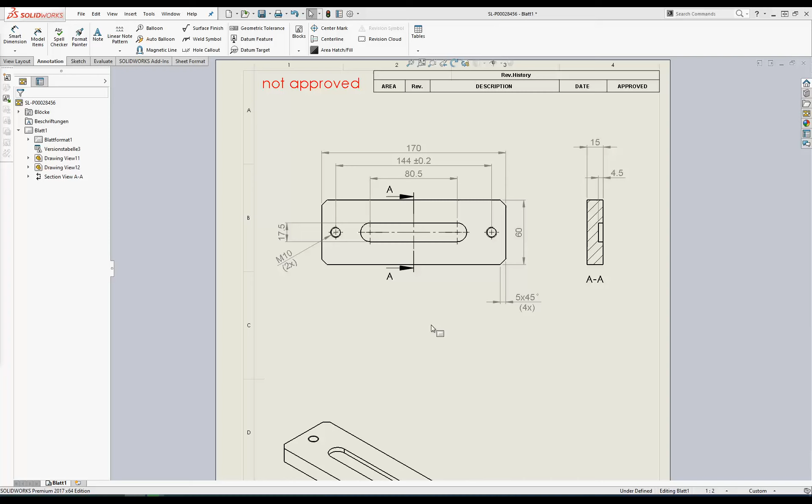We're doing a bit more drawing reading, tolerances and things like that. This is a super tiny part. Should take us no longer than 2 minutes, I hope. So what do we have? We have a little block. It is 60 times 170 times 15. We are in MMGS, of course. I hope. MMGS. Good, nothing changed. Great.

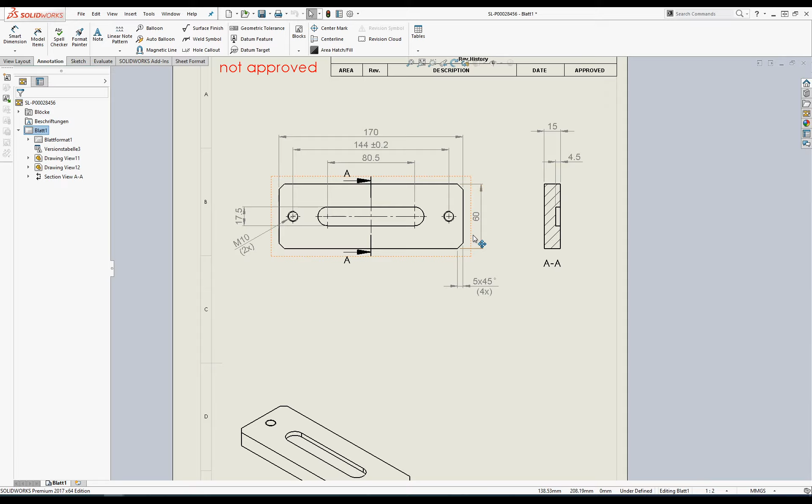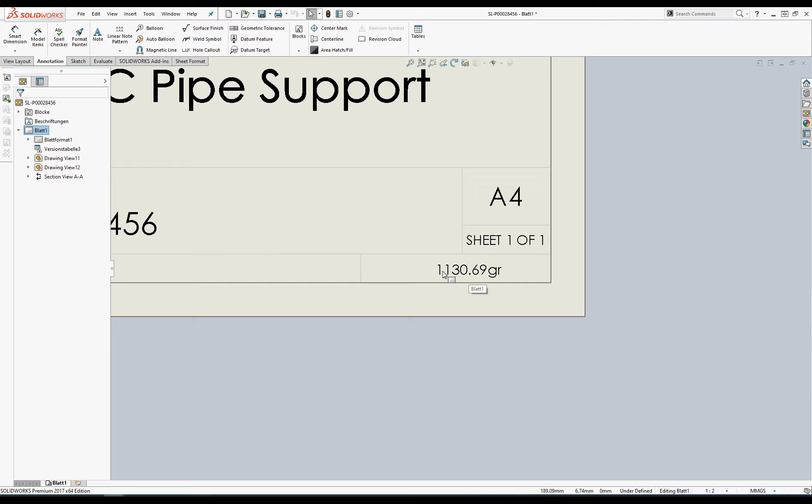So this is a piece of metal. It's made of this material. It is stainless steel. It weighs 1 kilo 100. So it's quite massive, but it's tiny. What else do we have?

So after we cut this part, we have a 5 millimeter by 45 degree chamfer. We have this slot here that's 17.5 across, 4.5 deep, and we have 2 holes that are through. M10 times 2, they are 144 millimeters from one another, plus minus 0.2 millimeters.

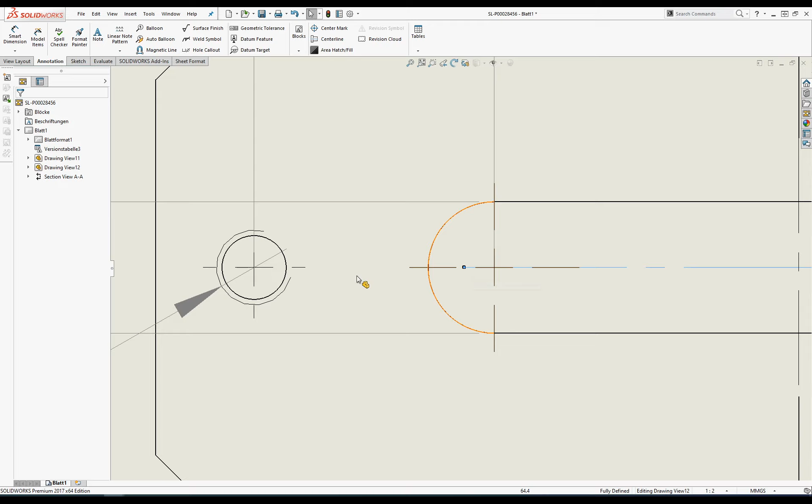And this is of course around the center, and they don't have a vertical dimension because they are also sitting on the center line. Like if you take a ruler and you check, this will be 1 to 2. What else do we have? This slot is 80.5 across.

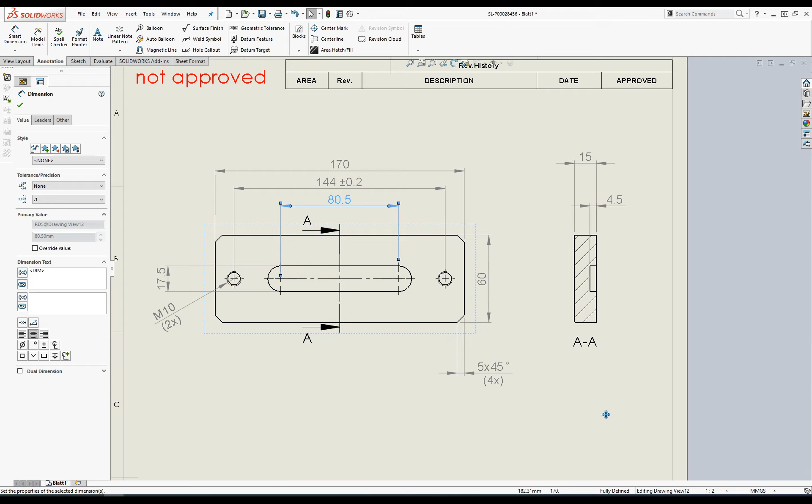This is to accommodate. This was a holder for a tube shell. Like there was a tube that needed to be held and fixed to the ground or to a plate, and this does it. Like the pipe shell is screwed through these two, and that is later on screwed into the floor.

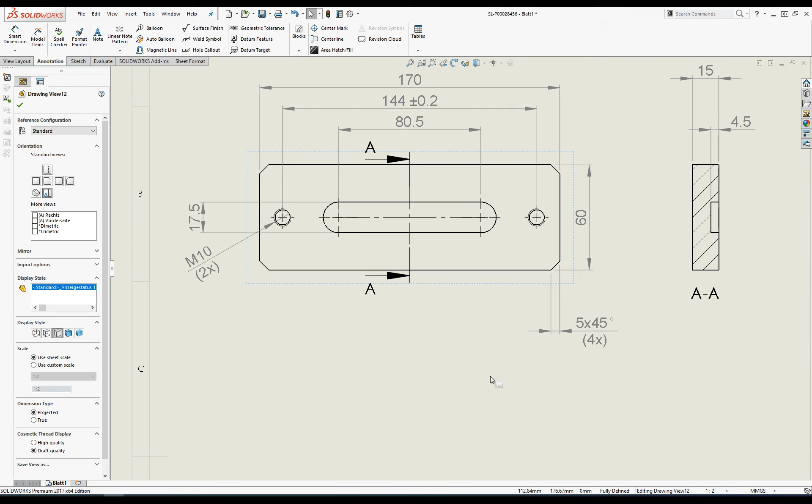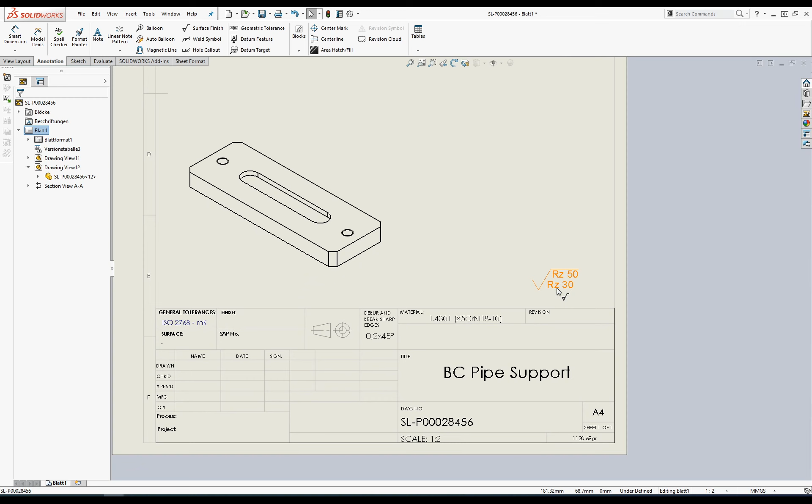At the bottom, at the header of the... It took me like 2 minutes 50.

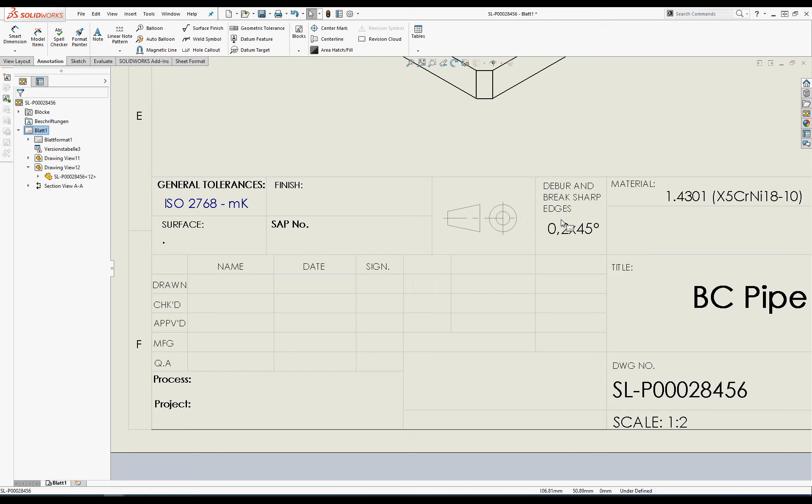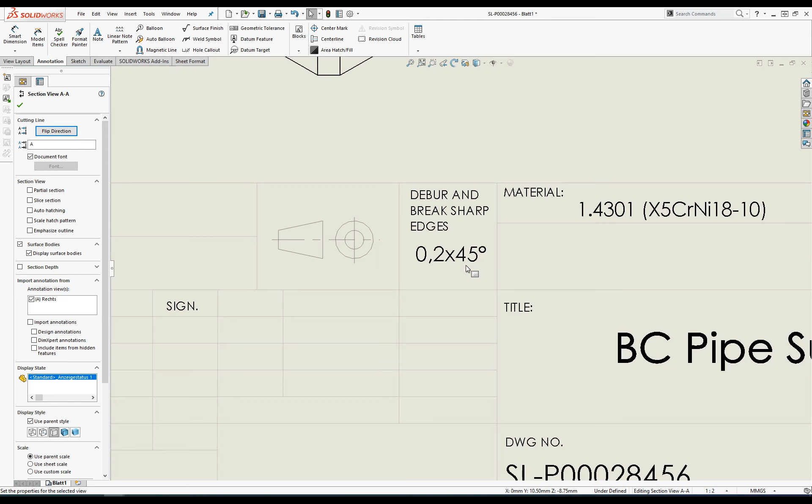At the header of the drawing, you have here that whenever you have something that's not dimensioned, like if you have a corner, for example this, this is a good example of this. This thing cannot be like 90 degrees exactly. So whenever it's not dimensioned, you have a 0.2 chamfer, times 45, and this is the general tolerances that you use.

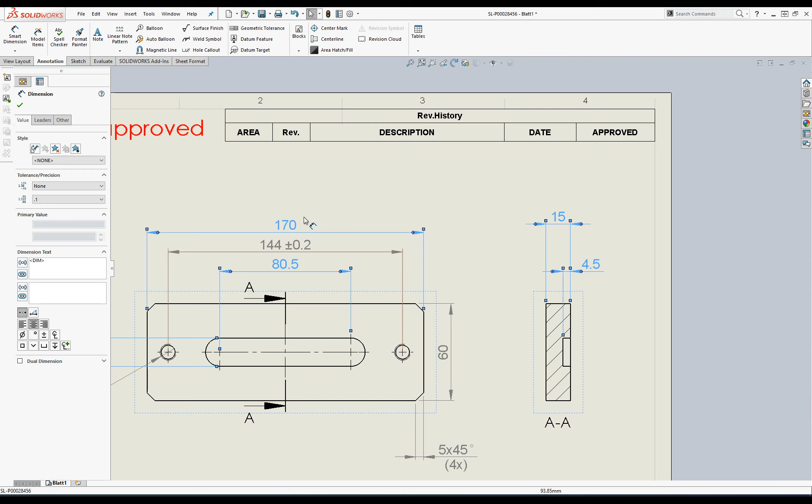And because, for example, this and this and this measurement, these also don't have a tolerance, but 170 doesn't exist. Like it cannot be exactly 170 plus minus 0.00000. So this 2768 MK means that it's the middle, like it's not the fine tolerance and not the rough tolerance.

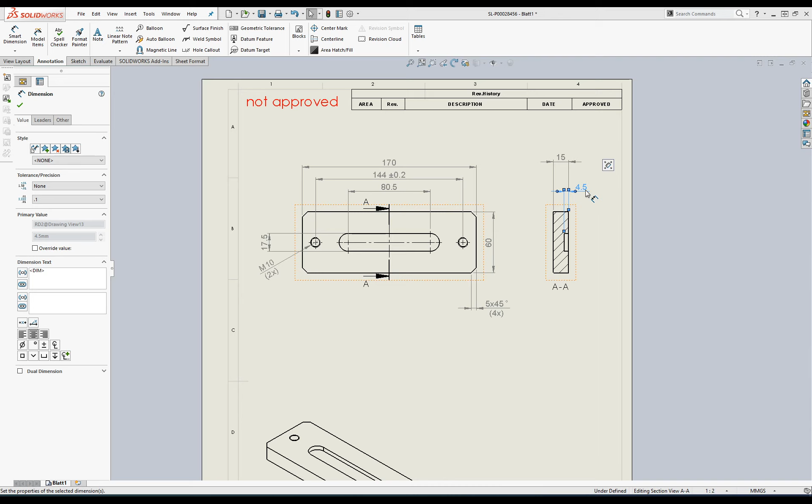They specify for each of these what they will be. Like I think this is plus minus 0.2 and this is plus minus 0.1 and this would be like plus minus 0.3 if I remember correctly. And yeah, that's it. Super quick, right? Super quick.